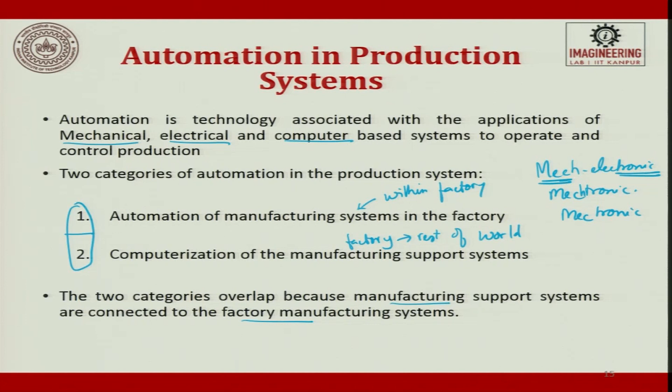So, examples of automated manufacturing system: automated machine tool is part of automated manufacturing system, transfer lines, automated assembly systems, industrial robot that performs processing like welding, painting. Today it also does defect identification, or assembly operation, where robo is used for assembly operations.

The automated material handling and storage system to integrate manufacturing operation. Material handling, automated material handling and storage system. Let us take a simple example. Let us go to a library, and in a library you have many books, and you have chosen to pick up one manufacturing book.

So, if you have to do that, you will go to library, get to see the access number, what is that book and where is that book, then go to the floor where the book is kept, that means to say in a rack, then go to that particular rack, start spending time, and then finally you will get a manufacturing book. So, you see that it is a lot of time consuming. Generally, when you go to library, searching for a book takes lot of time.

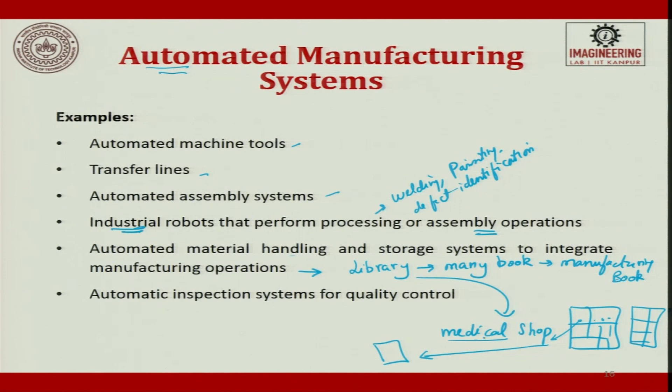For batch production, this is very good. When I say batch production, again I am not talking about in terms of thousands, but in terms of 10, 20, where there is a lot of product variation. So, then you use these robots and computer assisted robots, which will help you in producing it. The advantage is there is a consistency of the process.

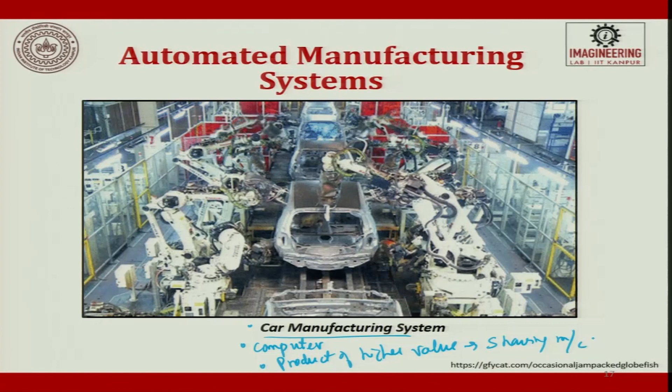Today almost all the car companies, computer companies and products which are of higher value, for example, even an automated shaving machine, are all done by automated manufacturing systems. So, in automated manufacturing systems, again there are 3 types. One is called fixed automation, the other one is called programmable automation, the third one is called

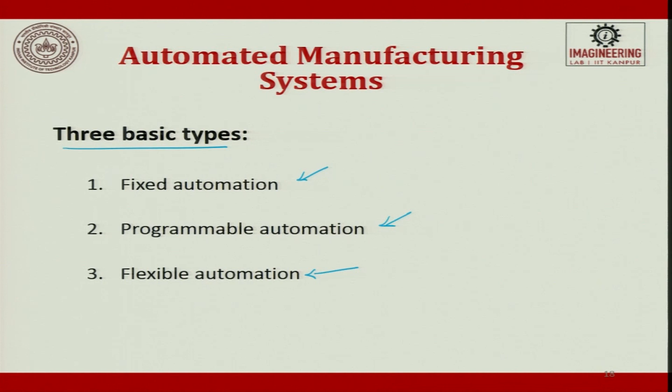flexible automation. Fixed automation is the manufacturing system in which the sequence of processing or assembly operations is fixed by the equipment's configuration. So, day in and day out you can produce only one product; you can have a small variation in the product which is accommodated by the manufacturing system. In fixed automation, we predominantly use mechanical systems like cams, springs, and levers.

It is typically suited for very high production quantities, so there is no change. For example, nail manufacturing: the wire has to be chopped, then upset forging has to be done to produce a head, and then you crimp the edge to produce a sharp point. 4 or 5 operations are all done in a fixed automation machine and we produce at high quantities, 1000 nails per hour.

Generally, it is a very high investment cost and customized machines are developed, which we call special purpose machines or SPMs, custom built only for that product to produce it in bulk. The production rates are very high, and it is relatively inflexible in accommodating product variety. Small variation means length, diameter, material, type can be changed. So, this is part of fixed automation.

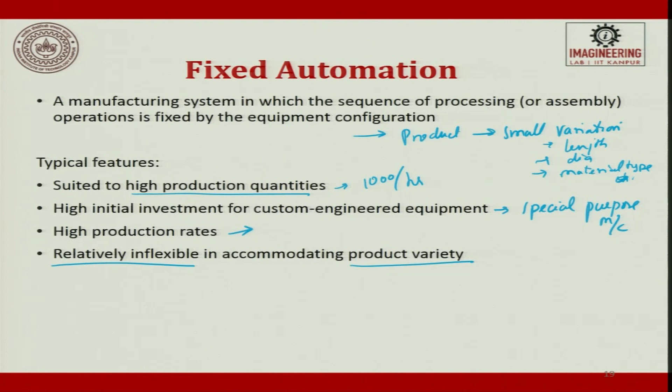Programmable automation is a manufacturing system designed with the capability to change the sequence of operations to accommodate different product configurations. Say there are operations 1, 2, 3, 4. In fixed automation, it goes through 1, 2, 3, 4 only. In programmable automation, you can cross 2 and use 1, 3, 4 alone, or make it 1, 3, 2, 4. I use a program or a robot to change the sequence a little and produce a different

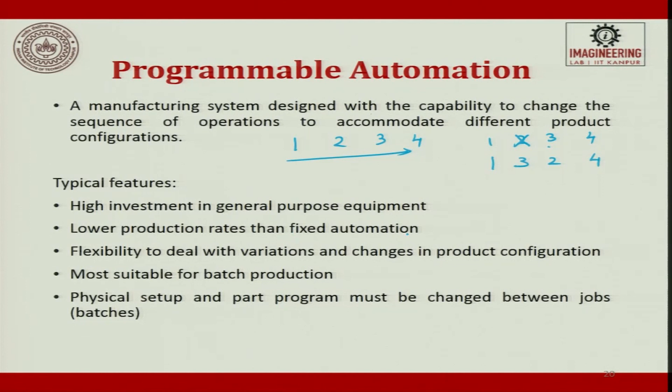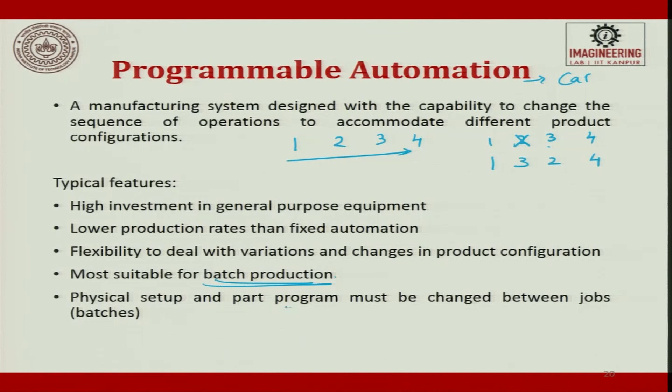product to my requirements. Programmable automation has high investment in general purpose equipment, lower production rates than fixed automation, and flexibility to deal with variation and change in product configuration. Car assembly always uses programmable automation. It is most suitable for batch production; the first one was for mass and this is for batch. Physical setup and part program must be changed between jobs.

The higher end is flexible automation, an extension of programmable automation in which the system is capable of changing over from one job to the next with no loss of time between jobs. For example, a CNC machine, such as a turning center or machining center. You are able to produce parts with huge variation from one part to the other, and the entire part is governed by the program you write. The rest of the setup stays, the program changes. So, this is called flexible automation.

High investment for a custom engineered system, continuous production of variable mixes of products, medium production rate, and flexibility to deal with soft product variety.

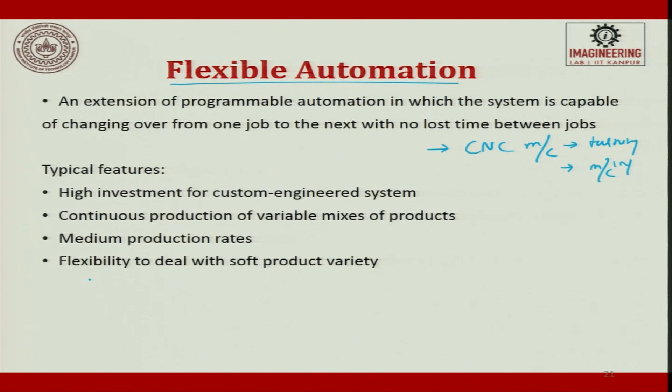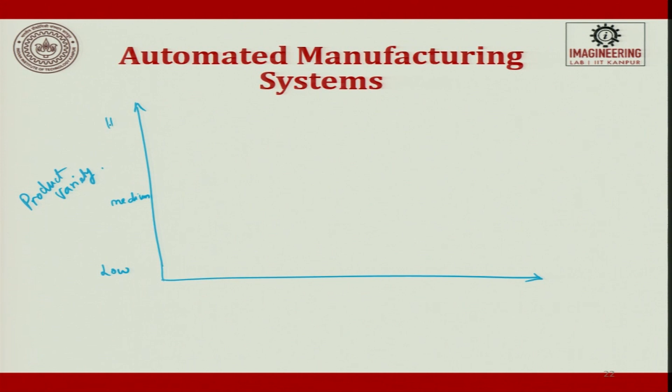So, if we look at the diagram of automated manufacturing systems, we write here product variety: low, medium, high, and here product volume: low, medium, high. So, now what did we see?

We said very high product variety and very low production volume is going to be programmable automation. Then medium product variety and medium product volume is going to be flexible automation.

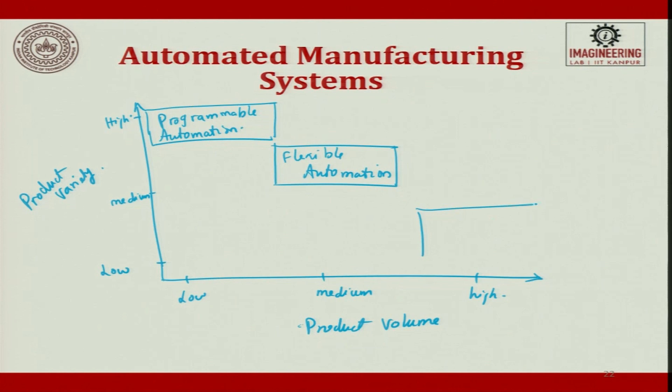And product volume high, product variety low, it is going to be fixed automation. This is only a representation. You will even have overlaps like this between the three: programmable automation, flexible automation and fixed automation. You can have overlaps also.

And here the product volume we are not saying in terms of numbers. For example, we are not talking about 10,000, 20,000, 50,000. It can be 1, 10, 15 or it can be 1,000, 5,000, 10,000, 1 lakh, 10 lakh, 15 lakhs, whatever it is. So, since we do not know the numbers, we just rate it as low, medium, high and low, medium, high.

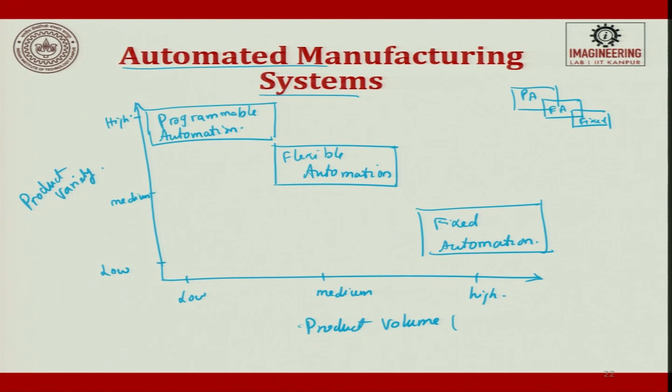So, you can see here the automated manufacturing system falls in this category. By looking into this figure, you can quickly remember which automation to choose for your product. So, the computerized manufacturing support system: what are the support systems? I said product design, process planning, process quality monitoring and then business.

Okay. So, now what are we trying to do? We are trying to automate this segment. Automating the manufacturing support system is basically to reduce the manual and clerical efforts in product design, manufacturing planning, control and business function. When we talk about product design, if we do it on a drawing board, every time there is an error, we start erasing it. And if I wanted a small variation and had to regenerate the entire drawing, it becomes very difficult.

So, today everything has become computerized. You have a single server in which all the parts and products are stored, and whenever there is a customer requirement, they pull out the library, look at the existing parts and see which part to tweak to meet the customer requirement. They make the tweak, store it in the server, and release it as a new product. That is how we reduce the manual and clerical effort in product design, manufacturing planning and control.

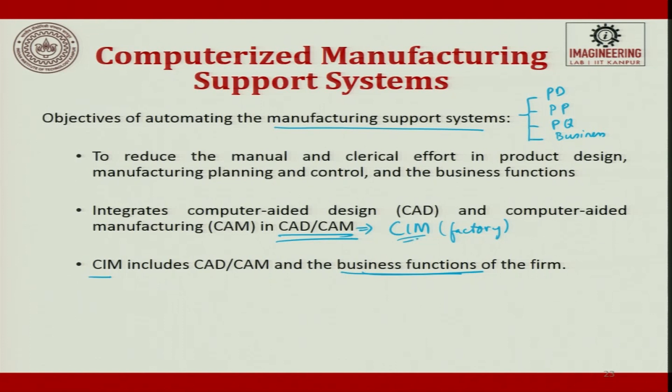And the business function. Here CAD/CAM is at the factory level, but the factory level alone is not the end. In CIMS, we also add the business function; only then does it become CIMS. So, why do we automate? We want to increase labor productivity. There is no fatigue allowance, no error produced, material handling happens without error, so no wastage; to a large extent it is controlled. This increases the labor output.

Basically, when you automate, you will not have cycle time variation. Cycle time is the time required to produce a part. From part to part and process to process, you will not have variation. So, when you automate, labor productivity increases, and you can also see the labor cost going down. Today labor cost is very high even in third world countries like India. Then, mitigate the effects of labor shortage.

In many developed countries there is a shortage of labor, and even today in highly populated countries like India and China, at certain skill levels we still have a shortage of people. Even in food processing, even in laddu making, we have a shortage. Skilled manpower is less, right? And for certain jobs like construction, there is a huge shortage. That is why today almost all infrastructure construction, be it roads or buildings, is getting completely automated.

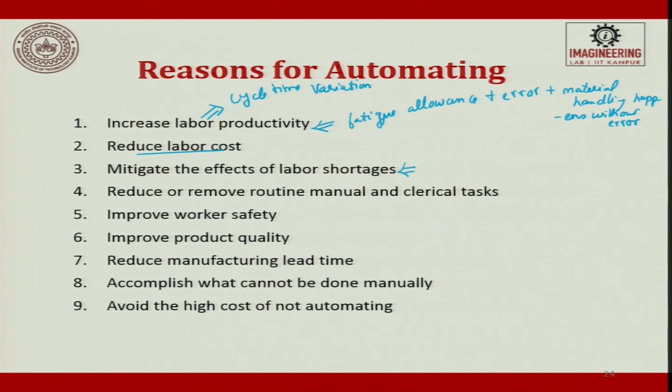For example, wherever there is a safety hazard, we can automate it and get it done by the machine, and avoid the high costs of not automating. All these things are the reasons which are leading to automation today. Is there a place for manual labor in the modern production system?

Yes. Earlier humans were doing unskilled labor. Today they are being pushed to skilled labor, and machines have taken over the unskilled work. Skilled machine and man interact and then do. So, now there is something called super skilled, or if I want to change this, I can write it as semi-skilled: unskilled, then semi-skilled, then skilled

labor. Okay. So, here they have so much knowledge, they can be used for programming of machines, programming of logics, and programming of software also. So, you can see they are really skilled labor. So, today more and more manpower is required in skilled labor rather than unskilled and semi-skilled.

When we try to automate, we try to hit at this point. Automation happens only between these two. Even here we are struggling. So, today in the skilled we are slowly trying to bring in artificial intelligence to automate it, which is the way the world is moving, but still a long way to go. So, today we talk about driverless cars. These are all completely skilled, artificial intelligence is used, and skilled labor is used for programming such things.

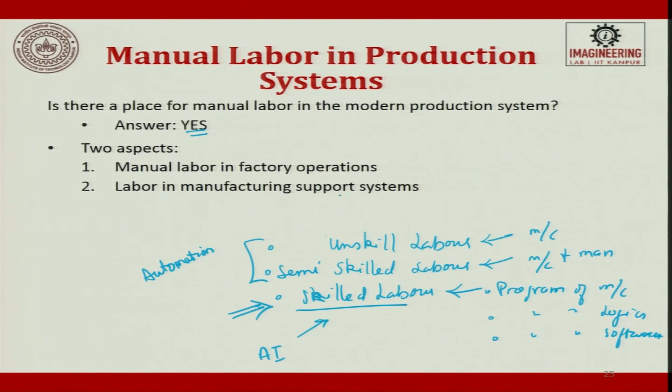Manual labor in factory operations and labor in manufacturing support systems are the two aspects which people look at even today. Manual labor in factory operations: the long term trend is towards greater use of automated systems to substitute the manual labor. So, again here we are talking about unskilled and semi-skilled labor.

When is manual labor justified? In some countries where the labor rates are too low, we go for manual. Where the task or technology is too difficult, we go for manual. For example, if somebody wants to automate pharmaceutical, or I would put this, if they want to automate combing of hair, or fixing buttons of a shirt, where the task is very difficult. You need two hands; with a single hand you can't mount, or you have to modify it. So, if you want to do such operations, the automation becomes very difficult, right.

Then short product life cycle times, wherever it is very short. For example, it is a seasonal business and the batch quantity is not so high. So, we always go for manual labor. So, shorter product life cycle. Then customized products requiring human flexibility. See, the most flexible end effector, robo arm, is our human hand. Depending upon the force, depending upon the orientation, you balance the load by yourself and then start doing it. To cope with ups and downs in demand,

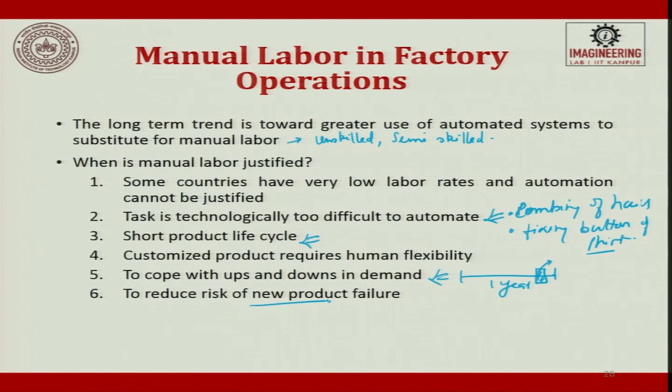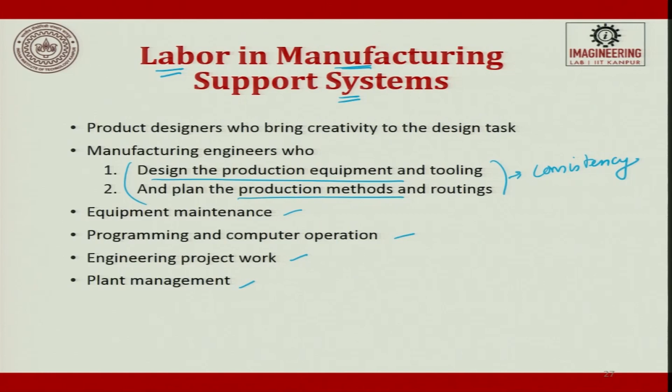So, equipment maintenance, where labor is used, programming and computer operations, where labor is used in a big way, engineering project work, and plant management. These are the areas where labor is used in manufacturing support systems. For example, going to a customer, talking to a customer, understanding his need has to be done by labor, which is part of the business. So, the manufacturing support system even today needs a lot of skilled labor to understand the market and customer, and convert it into engineering specifications such that it could be produced.